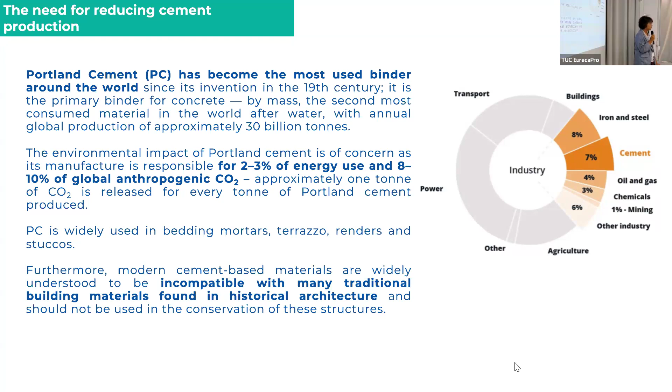This material is non-compatible with the historical ones. Therefore, there is a need to research and look for alternative supplementary materials.

Regarding terminology, when we talk about mortar, this is a mixture of binder, fine aggregates, and water. The fine aggregates are those with a dimension lower than 4 millimeters. Concrete is a mixture of aggregates of higher dimension, cement, and water.

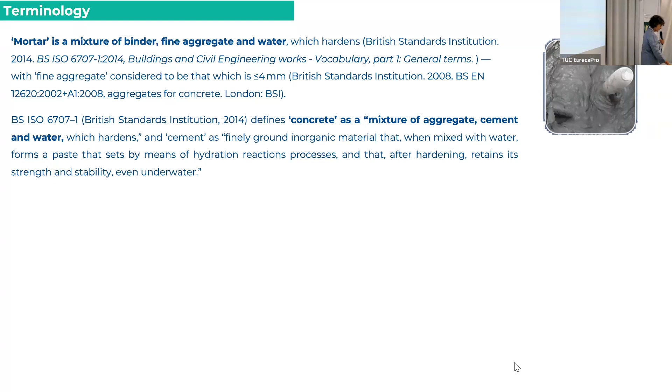In this process, the cement with water hardens and retains strength and stability even underwater. Cement is considered and reserved as a hydraulic binder with a low quantity of free lime.

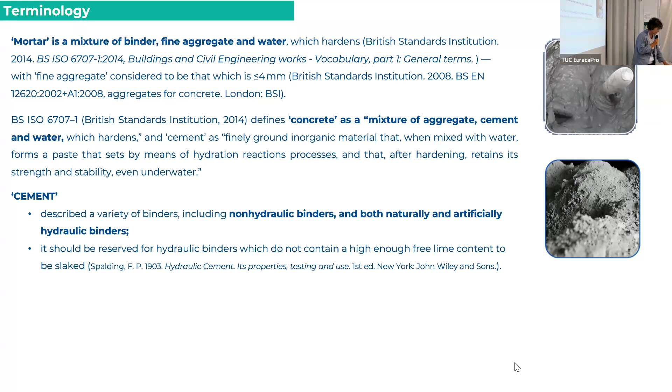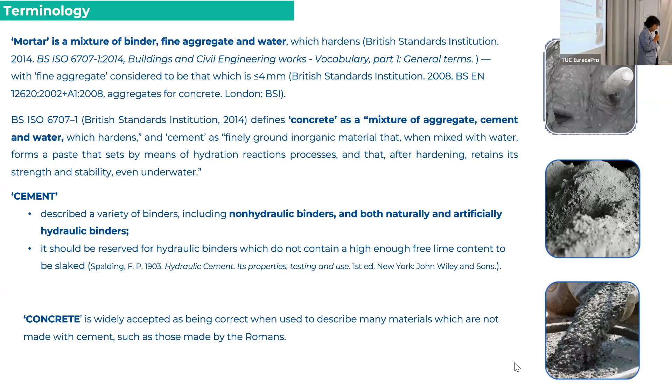We can use the term cement for describing other hydraulic binders, both natural and artificial. However, the term concrete refers to materials made with cement, but may not necessarily contain cement, such as those made by the Romans.

If we go a little bit into the past, looking at the use of lime and concrete in construction, we find early uses of lime employed for interior floors, and sometimes aggregates higher than 4 millimeters were used.

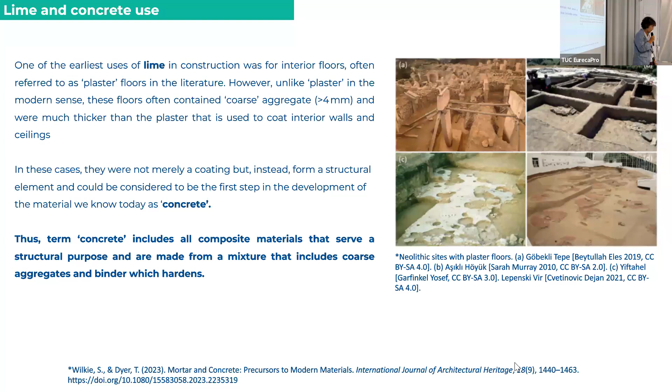Those aggregates and this mixture are considered the precursor material to concrete. Therefore, with the term concrete, we include all composite materials that serve a structural purpose, made from a mixture including coarse aggregates and a binder that hardens.

If we proceed with the burning of limestone, but in those materials we also add some siliceous material, then another very important hydraulic component, the calcium silicate hydrate, was yielding, and this material can also produce at the end calcite and silica after the deterioration process.

Similar is happened when we have the natural hydraulic limes in which we have an argillaceous or marlstone, and after the burning we have the production of calcite and the production of those hydraulic phases, which upon deterioration can give again calcite and silica.

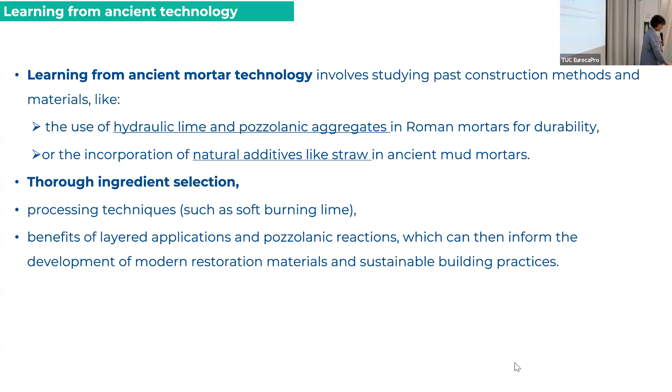Then we can have mortars with a great durability, and if we have a thorough ingredient selection of those mortars and with processing techniques like the soft burning lime, and if we benefit from the layered application and the pozzolanic reaction, then we can develop modern restoration materials and sustainable building practices.

And in that case, we have the reaction between slaked lime and high alkali materials, which can produce hard, durable, and waterproof material. Therefore, we can say that the addition of pozzolanic material to the aerial lime, which was widespread

by Romans, it was not a Roman discovery, but it was used in different civilizations from the antiquity and produced very hard and durable mortars.

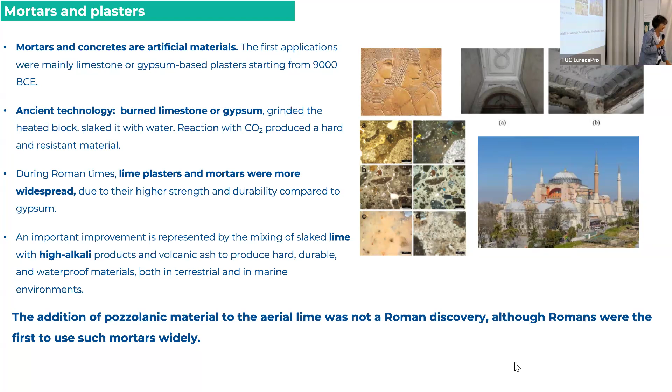So, what we have learned from the ancient mortar technology is the use of local materials and locally sourced materials, which provide compatible restoration mortars, but even they can also sustain the local economy of a place.

Then the use of hydraulic lime and natural and artificial pozzolanic materials, which form strong water-resistant compounds, different additives of inorganic and organic nature, the layered application of those mortars, which functions as a composite material, and this helps a lot to the final durable appearance and the consistency

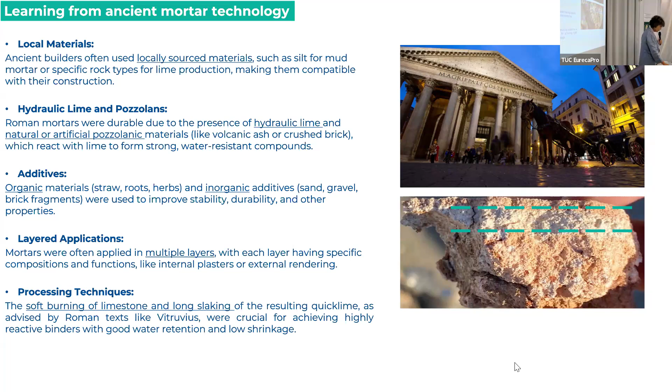of the mortar. And important thing is the soft burning of limestone and the long slaking of lime that resulted in materials with good water retention and low shrinkage.

Therefore, we have, after those applications, buildings and monuments like here the Great Wall of China, in which it was found that tree bark, volcanic ash, rice, beer, and even urine has been used as additives in the mortar preparations.

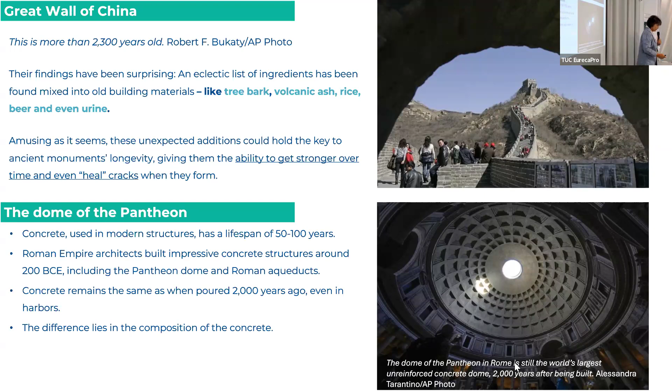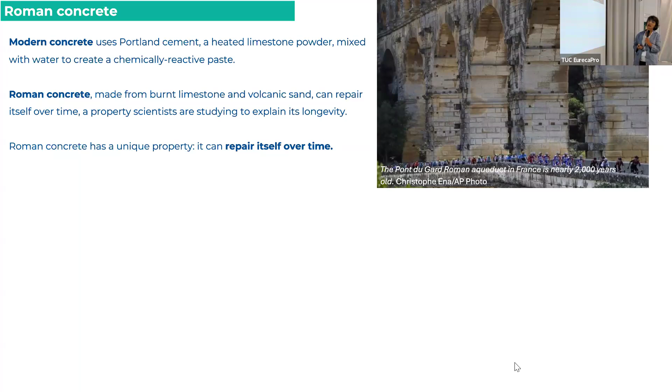Then we have the domes of the Pantheon, which is an impressive building and an example of not reinforced concrete 2,000 years ago. And we can also find some aqueducts in which the Roman concrete that was used and derived from burnt limestone and volcanic sand shows a very source of longevity here.

And finally, what is discovered from specific and explicit studies under the scanning electron microscope is that this ability of Roman concrete was due to its possibility to repair itself over time.

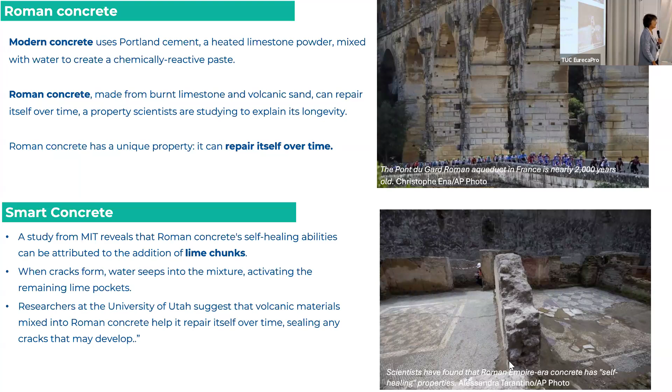And this is totally due to some lime chunks that were inside the structure, and those lime chunks can function as activating points when it was a necessity and produced again calcite. And after this process, they help a lot in the repairing of this concrete over the years.

Concluded, we have mortars that are fundamental in constructions and were applied for thousands of years. Those hydraulic binders that have been used from pozzolanic materials enable durable, watertight, and underwater structures. We have lightweight aggregates and early reinforcement attempts that reveal the remarkable engineering skill of that time.

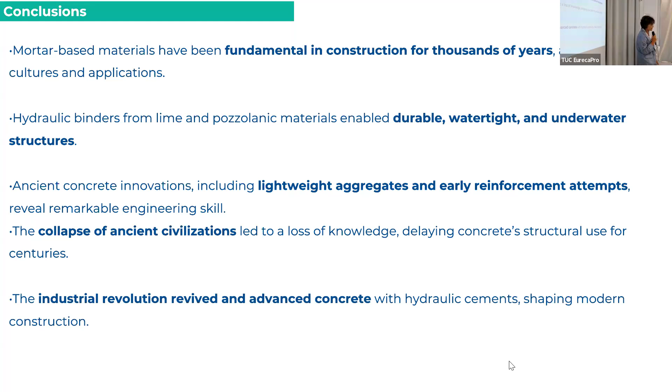Of course, the collapse of the ancient civilizations led to a loss of knowledge and delayed the concrete use for centuries. Nowadays, we have the industrial revolution, revived and advanced concrete with hydraulic cement that mainly shape the modern construction.

But we know that the conservation of historic sites requires the understanding of the site and the materials. So we have to produce and propose products that would be compatible to the original ones, and those can show an improvement compared to the historic materials, especially under the severe climate change effects that we face today.

Therefore, into this direction, the sustainability concerns with the Portland cement use highlight the importance of revisiting those historically locally sourced materials and how we can learn from the traditional construction techniques and how we may integrate those techniques and materials in the modern technology without copying exactly all these recipes, because nowadays we face other more severe problems.

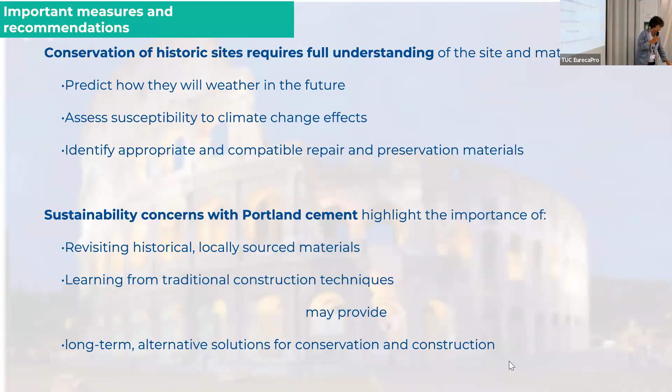And if we are going towards this direction, we may provide some long-term alternative solutions for conservation and construction. Thank you very much for your attention.

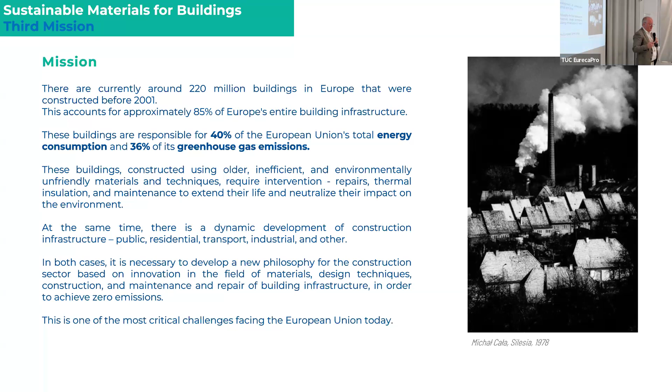This construction sector is really considered one of the most problematic in Europe nowadays, and brings very negative impact to the environment. That's for sure. The European Commission for many years didn't really want to admit it, so the construction sector was relatively abandoned by European Commission funds. Just now the European Commission started to see the problems with existing infrastructure, the needs, the money, and the environmental impact, so they decided to put some money on that.

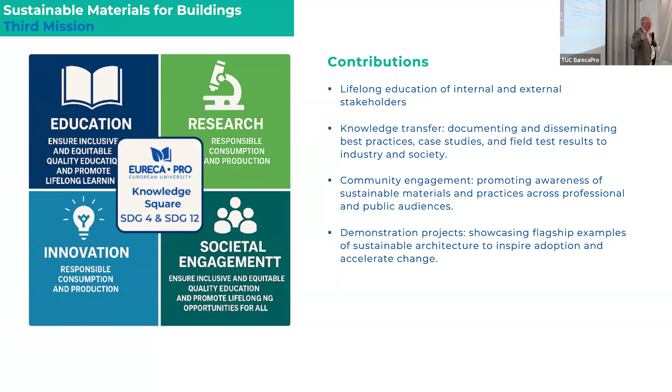I'll just recall what Noni said about the Square of Knowledge. Our idea of the flagship is based on the Square of Knowledge, and the third mission is a big part, but you can't just spread it—third mission is not far from innovation, it's all together, just one block. So if Noni is working in the laboratory, it will have an impact on stakeholders. We are stakeholders, you are stakeholders. You're sitting in a building, you'll return home to a building, you'll use roads, bridges, structures, concrete, non-renewable materials, energy consumption, and so on.

So in response to that, the European Commission decided to help us, recalling the old concept of Bauhaus. Bauhaus was a movement established in Weimar 100 years ago, just after World War I, in response to the needs of the stakeholders, the people. Just after the war in Germany, people had no places to live, the country was ruined, so there was an idea of cheap housing, environmentally friendly, beautiful and functional, simple, small, and close to other facilities, like a 15 minute walk.

We know this concept today as 15-minute cities—you go and have everything within 15 minutes. So that's also the idea. The new European Bauhaus today recalls this idea and brings political support, but also a lot of money needed for this sector. It joins the sustainability we believe in with something they call beautiful—it needs to be generally beautiful, but not treated simply as this is beautiful, it can be socially beautiful. It's much more than that, it's a philosophical question, and we should make it together, which is supposed to be inclusive.

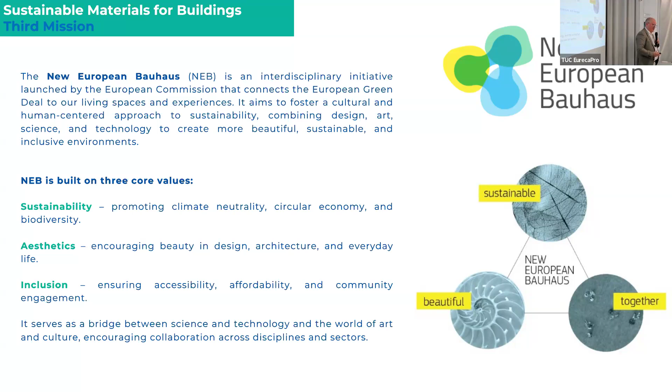The New European Bauhaus values are being used more and more in our group, it's organized, of course. The European Commission decided to give incentives and money to places they think need support. The first axis is called Reconnecting to Nature, focusing on restoring relationships between people and the natural environment through sustainable design, biodiversity, and ecological awareness.

Nothing about infrastructure directly here, but behind this there is a thought about infrastructure, new materials, sustainability of the built environment for people, for production, and so on.

Regaining the sense of belonging. So again, small cities, you know it from France, Le Corbusier, his ideas about unit cities, or 15-minute cities, friendly, green for the people. Prioritizing the places and people that need it the most, inclusiveness for those who really need it.

Behind this idea is, for example, building 450,000 small apartments for people who have no place to live. It's also to be built with innovative materials, cheap materials like timber, for example, that regains the interest of the European Commission.

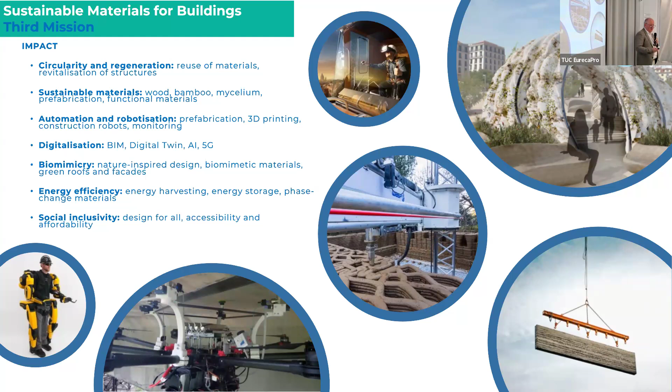So just to show you the momentum we are in with the European Commission, I will not read it through, you can probably see it later.

So, leaving this lovely slide at the end, we'll just appeal to your understanding of the need for establishing this flagship, together with this very unique possibility that we have, this unique momentum that the construction sector is at the moment. In my opinion, it would be a real pity if this group doesn't create something for having this aim in mind in our daily life under the auspices of EURECA-PRO. Thank you.

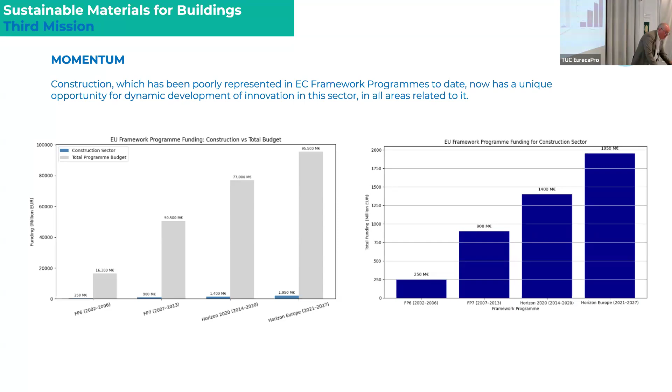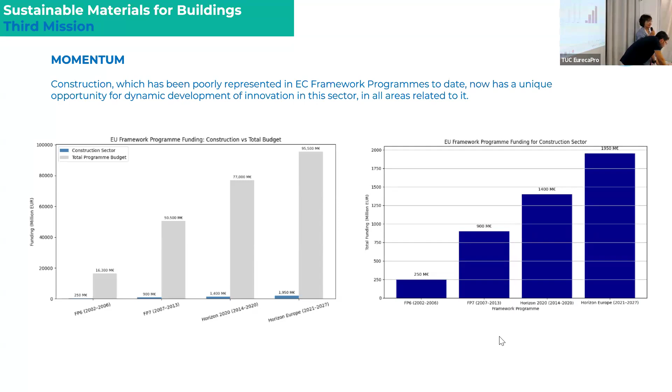Thank you, Marcin, for this very holistic presentation on the topics of our core group and our aim to establish the flagship in the EURECA-PRO Flagships. I would like to ask the next speaker, Galetakis, to present the role of recycling aggregates and construction materials in construction fields.

The content of my presentation: just a few words about construction and demolition waste, why we chose this stream of waste. Then I will talk in more detail about the research topics we have worked on, the research projects related to these topics, publications, and finally some words about lab infrastructure and team.

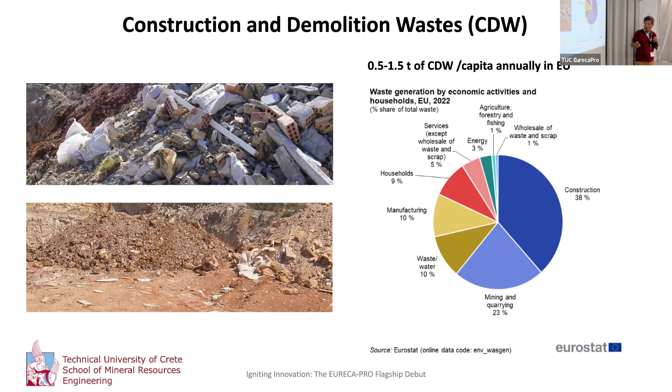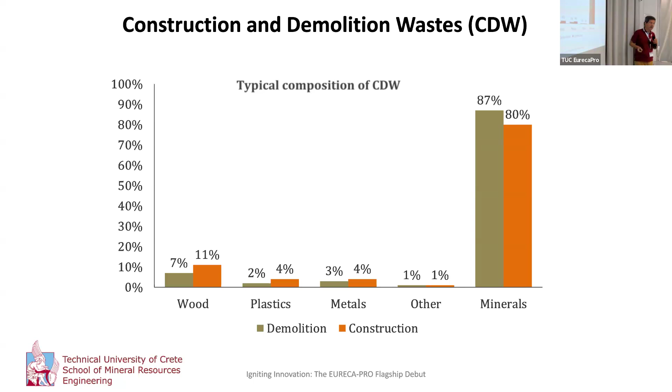Now let's see our research activities up to now regarding the utilization of these construction demolition materials. They can be categorized into two main fields. One is the best known, because the technology is quite simple and has been used for many years - how we can use these materials as aggregate, the simplest way to utilize it without developing expensive technology or using very intensive processes. So this is the first application: to produce aggregates.

The aggregates produced from this waste, if they don't have any treatment, are of low quality, meaning they can only be used for low-bearing concrete or as backfill material. If we want to produce upgraded aggregates, we have to make additional treatment - designing and constructing a more sophisticated crushing and sieving system to selectively separate the mortar from the primary virgin aggregates.

This is a field where we have already developed research activity, but we focus not only on producing upgraded aggregates, but also on finding a way to utilize the fine waste produced during liberation of these aggregates, since the cement paste is much more brittle than the aggregate and forms a very fine fraction that has to be utilized. One approach we've used is thermal activation - heating to around 600 degrees, which turns this material into a kind of cement again, so it can substitute part of the cement in mortars and concrete products.

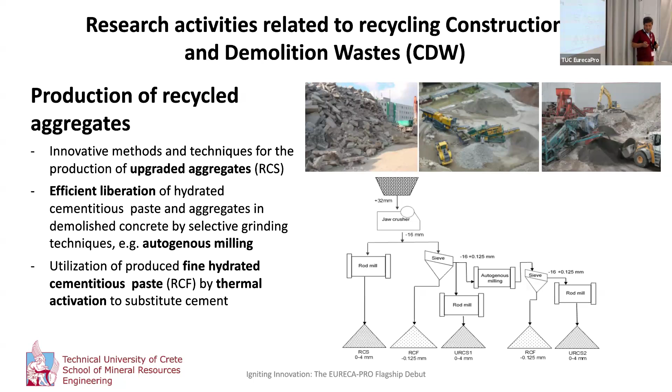Another research topic from the previous year is how to use aggregates produced from concrete, bricks, tiles, and other construction demolition materials to form common cementitious products like paving bricks and slabs. We have developed special technologies based on compaction molding, free flow casting, extrusion, and the more innovative geopolymerization.

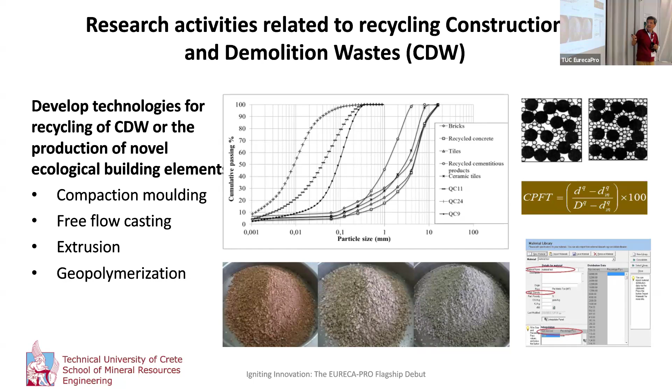The challenge is that recycled aggregates are not like natural ones. They have high water absorption and different shape and texture compared to natural aggregates. So we need to develop special models to predict the properties of the new cementitious material, and special synthesis mixing models based mainly on packing models of the grains. This is challenging work, and research on this topic is still ongoing.

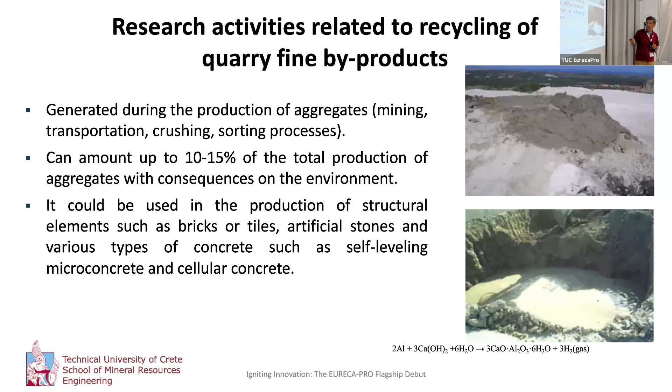Another problem the concrete construction industry faces is the production of fine waste material generated during aggregate production. This fine material constitutes a severe environmental problem, and we have to find solutions to utilize it. The solution we are exploring and developing at laboratory scale is...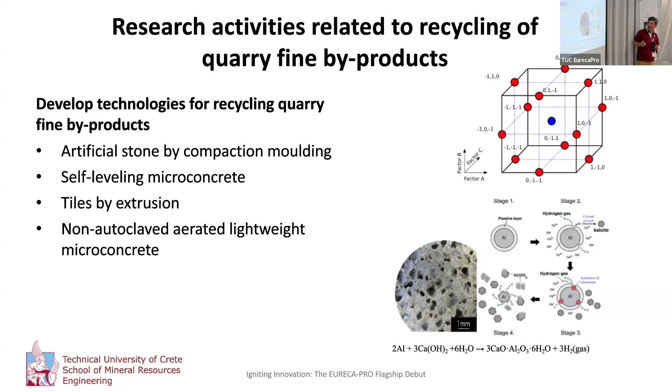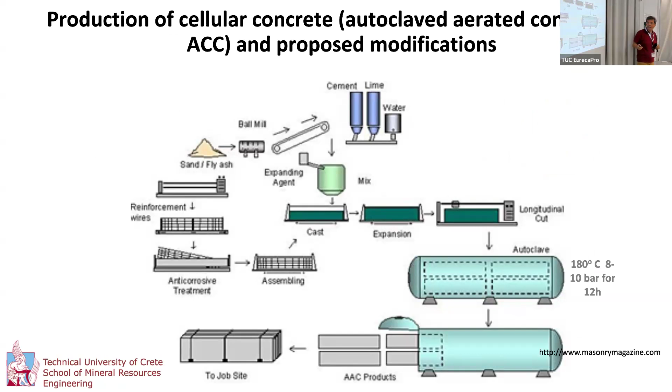...to produce either artificial stone by compaction molding, self-leveling microconcrete, or tiles by extrusion, or non-autoclave aerated lightweight concrete. I'll show you the idea. This lightweight microconcrete is a substitute for well-known commercial products like autoclave aerated concrete - you know the firm Ytong or something similar.

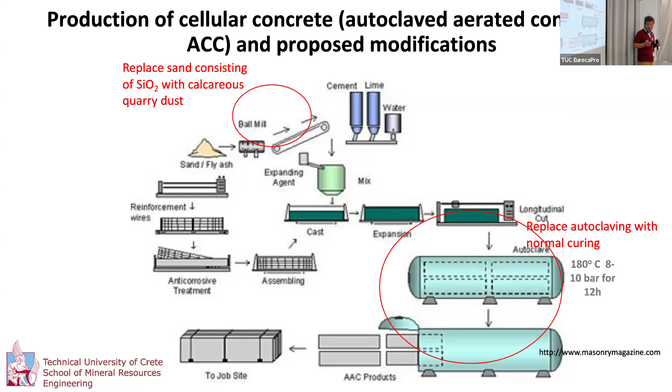We studied how this material is produced, and found we can substitute the silica sand used with fine material from quarry waste, and also substitute the autoclaving procedure with normal curing. This means we have a low energy consumption process, and we've produced this material at laboratory scale with these pores you can see. We are currently working on developing prototypes at a larger scale.

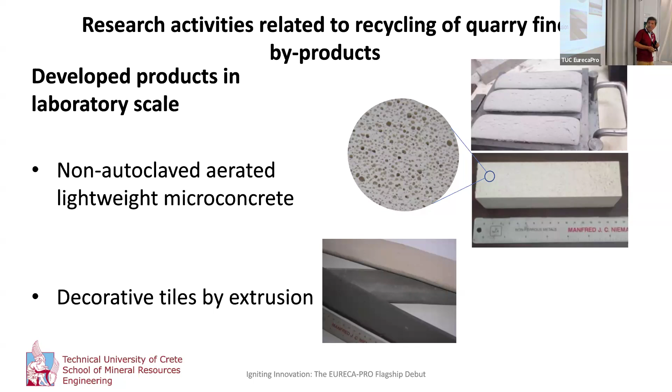Ongoing research also includes utilizing waste fine material from asphalt mix plants - another fine waste that poses severe environmental problems - to develop cement mortars with electrical energy storage capacities. This happens because this fine waste is enriched in carbon, which changes its electrical properties if treated in the right way.

So it can create a kind of battery. This means we can develop mortars or other cementitious products which can act like a battery in a building.

We are also working in another region, using fine quarry byproducts for production of lightweight concrete, but not using the common foams typically used for this - instead using a foam made from carbon dioxide and special chemical additives. We are also working on curing this cementitious material in a carbon dioxide environment instead of water.

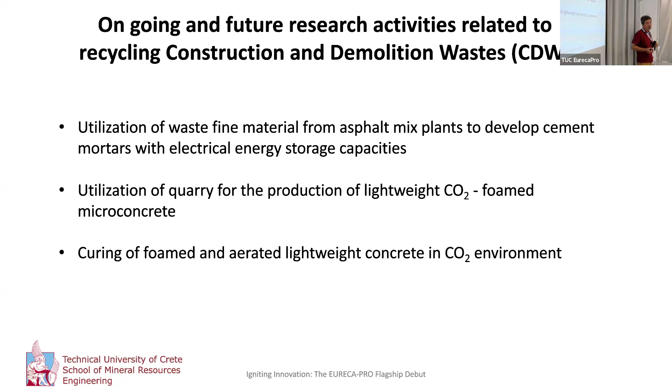This means the curing using this environment is shorter, and we also get a lot of environmental benefits because it absorbs carbon dioxide from the atmosphere.

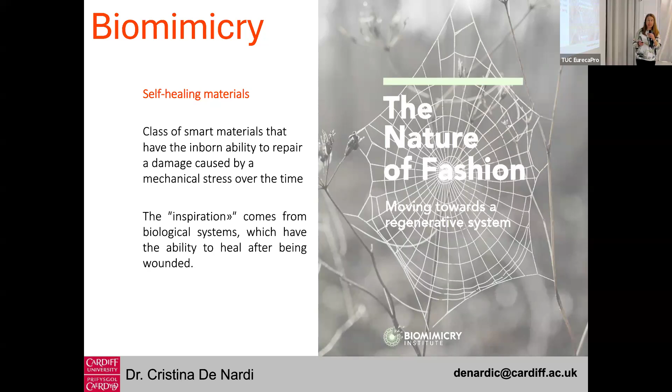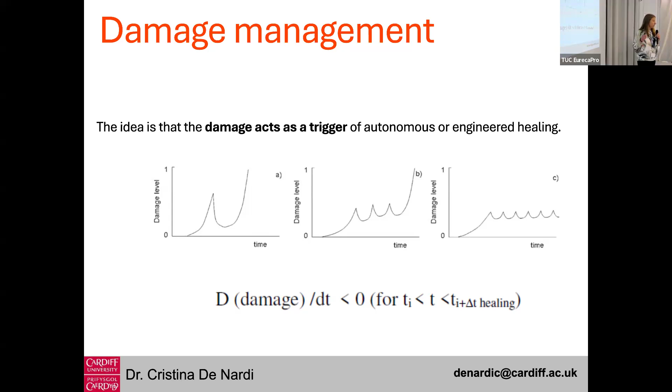So the inspiration comes from biological systems, that's why it's also called a nature-based solution material. We can't stop aging, we can't stop having damage, but we can consider a different approach in terms of damage management. The damage acts as a trigger for the self-healing. So we include the damage as part of the healing process.

Among other technologies widely studied in concrete mainly, but also in asphalt or polymers, I would like to introduce vascular networks. The inspiration comes from the arterial system in human bodies. Ideally, you can have an arterial system running in your building, and those vascular networks can host healing agents, giving you the opportunity to supply different healing agents at different times, or to continually supply healing agent if needed.

But as you can imagine, the real scale is not yet constructed. So in Cardiff, we have developed an alternative technology which still keeps the concept but is more reliable. We designed what we call mesovascular networks.

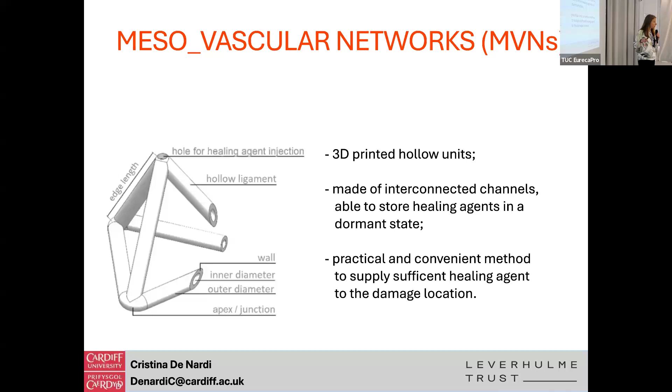They are 3D printed hollow units made by interconnected channels, and they can store healing agent inside. So when you have a crack, and the crack crosses one or more of those ligaments, they are broken, and at that time they can release what was stored inside.

So they can store single component healing agents, basically silicates, or they can also store a dual component healing agent, as most common adhesives are made of two components. They are made by two coaxial channels, so when you have a rupture, the crack also occurs in the matrix.

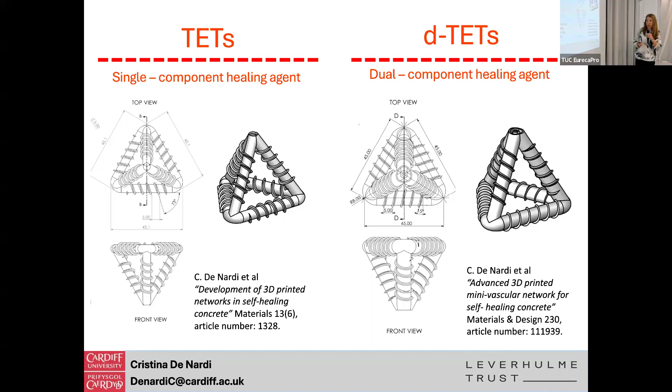The stress can be transferred to the units. You have the breakage of the units, and only at that time the two components come together and can react in the concrete matrix. We test them at lab scale at the moment.

We place them in the middle third of concrete prisms. We use sodium silicate as a single component, or sodium silicate in combination with nanolime or nanosilica, because those second parts can act as an enhancer or promoter of the healing reactions. We test them under flexural test, and we analyze what we call index of healing in terms of strength and stiffness, which is not so complicated - we are basically comparing the flexural strength after healing in relation to the original strength before damage, and to the residual flexural strength.

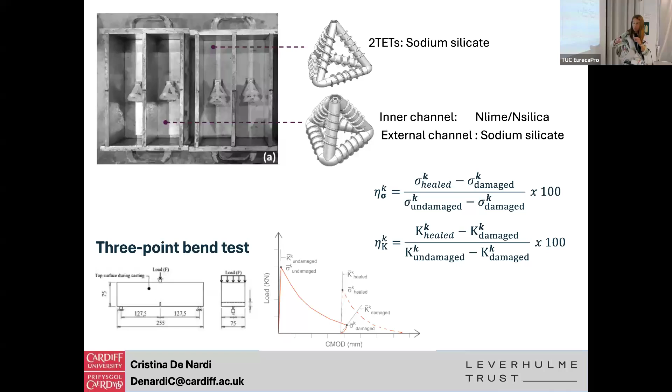Here is how we place them in the middle third. These are pictures when the sample was under load. You can see a clear discoloration in the center, which means that what was stored inside has been released, so it's able to react.

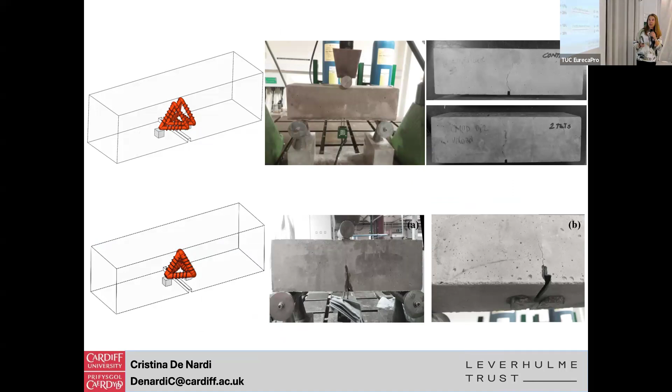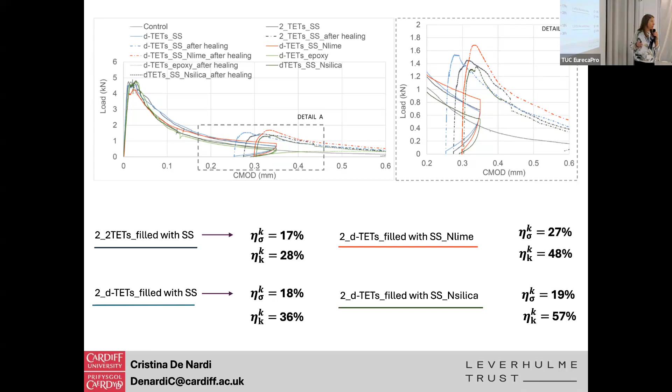Briefly, with a single component you can recover the strength by about 17%. With a combination of sodium silicate plus nanolime, you can gain 10% more in strength recovery, and 20% in terms of stiffness. So when they are together at the time of damage, they can respond with more healing efficiency.

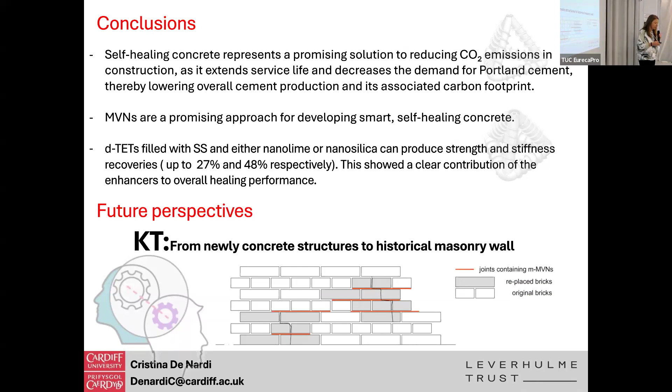In conclusion, we can transfer what is done by biological systems into construction materials. We have a promising approach based on these mesovascular networks. But I would like to go further, transferring this knowledge - built up over about two decades so far - from newly built concrete structures to historic buildings, and see how we can transfer some of those technologies into historical masonry structures with the proper requirements.

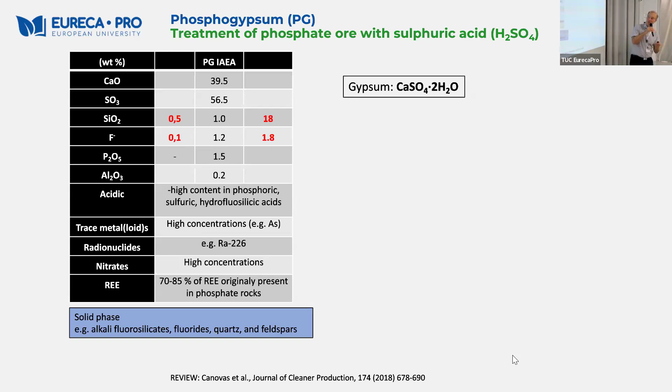Again, here we're looking at phosphogypsum, and the specific thing which makes it interesting for me is that it also contains trace elements of naturally occurring radionuclides. Since I'm linked to nuclear technology, I focus on the residues which have this kind of issue, and I try to see how we can deal with that.

An important concern is, in this case, the phosphogypsum. If you compare it a bit from the point of view of natural radioactivity with other types of gypsum, it's very broad. For example, many types of phosphogypsum don't really have any issues with the presence of naturally occurring radionuclides, while some have larger issues than others. This also applies to other trace elements or rare earth elements, which very much depend on the process or the origin of the ores used. This is typical for many residues - there's a very diverse picture, and it's difficult to come up with one solution for all these types of residues.

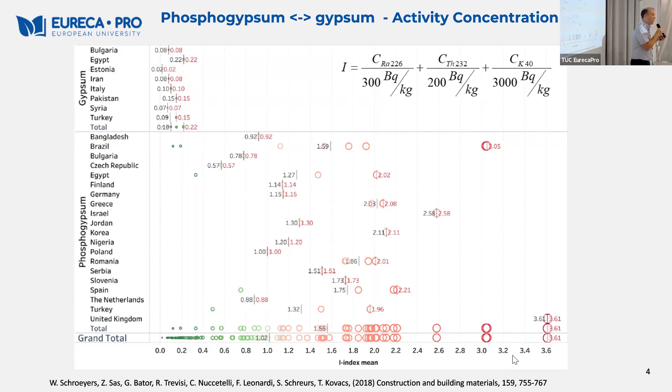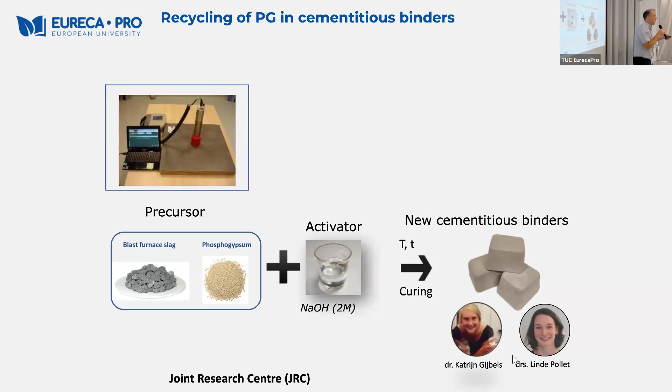Anyway, as we said, we are focusing on recycling in cement or construction. We are considering alkali-activated materials, or in our case aggregate binders, where even phosphogypsum can have a much more beneficial function. So we're looking generally at all types of synthesis binders, asking: are these suitable options for phosphogypsum recycling? And of course, we are technical people, so we think if we can solve all the technical issues - durability, strength-related properties, soundness, expansions - if we can deal with all these, we believe recycling will be fine.

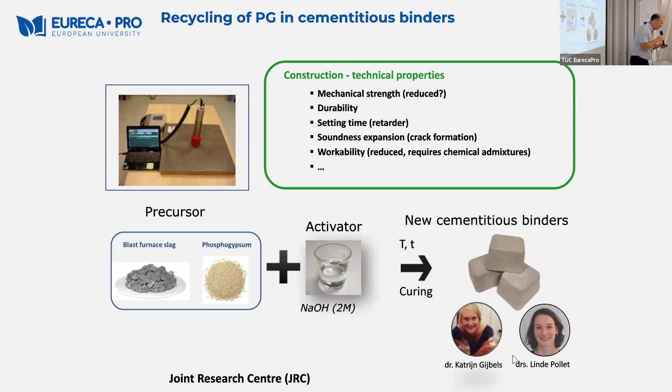But is it? One of the main challenges - I just had a PhD student of mine who graduated in this field, and that went really out of my comfort zone, because we were looking at stakeholder acceptance. We are thinking, okay, we're calling these residues norm, we're calling this waste, and then we think people are just going to accept it even if we put in a treatment and use them in cement or concrete. The moment you put a label on it, you're really putting a barrier for the cycle.

In this case, we look at different types of perspectives. I will look at the perspective of industry, and I'll tell you why. As an end user, are you really going to choose the type of cement for your house? No, you're going to rely on the companies and subcontractors to make that choice for you. But if there's something wrong with these residues or materials, you're going to hold them accountable. So the industrial acceptance and point of view is crucial. So we looked at industrial stakeholders, and we said, okay, we have these residues.

We are just taking phosphogypsum as an example. How would you look at accepting this type of residue for use in cement in construction? Which factors do you consider?

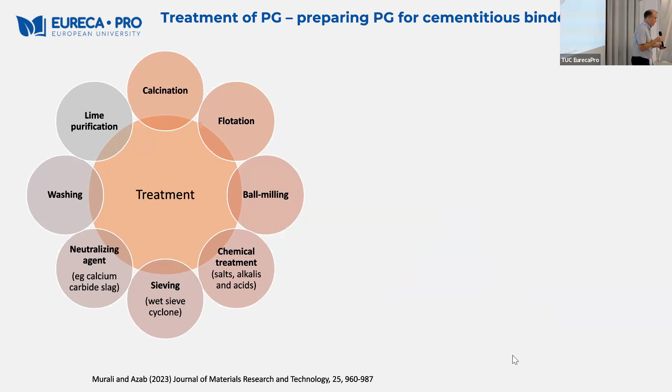I'm just saying some ways to overcome that, and sometimes for this type of residue I only see this option. I believe we need to treat, because regulation will change so drastically that we need all kinds of treatments for these residues, to make sure they are not a norm anymore - otherwise at a certain point you will reach problems if you don't provide suitable treatment.

These treatments will also make your residues suitable for construction. I tried for a long time to get real reuse without treatment, but I found that at a certain point that will go wrong - things will catch up with you.

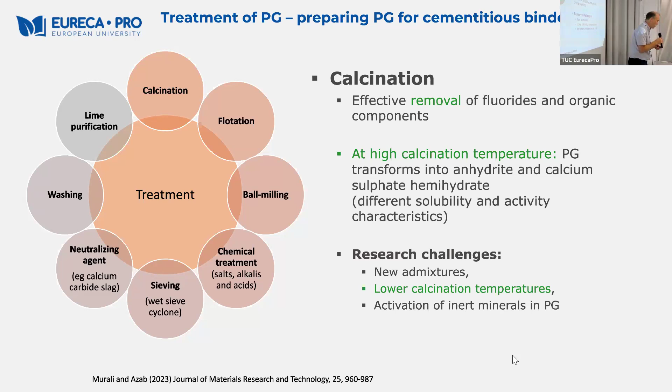All these treatments will make sure that you have a much better quality of construction material, which is crucial for this kind of approach. I'm not going in depth there - I think I've made the key point I wanted to make.

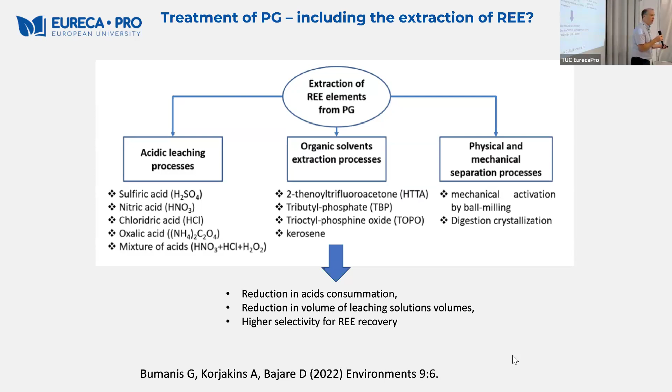So you look for added value, of course, but unfortunately you cannot always get added value, depending on the residue you're looking at and its properties. So this is basically what I wanted to tell you. Thank you for your attention.

Thank you, Wouter, for this presentation. The introduction is important for another aspect we will cover in this workshop - very important, the guidelines for upscaling a product and having this collaboration with companies.

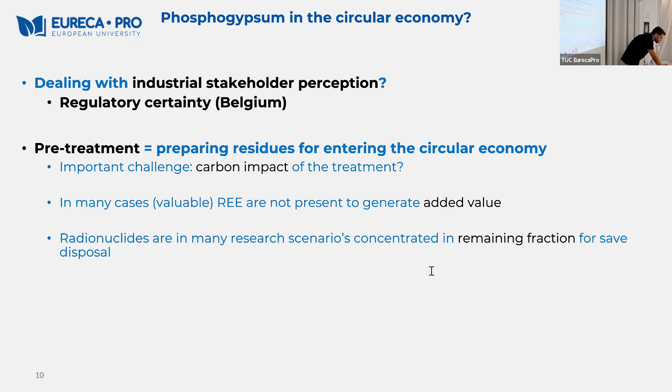Now I would like to ask Henry Goldmann to express his experiences as a student here at the Technical University of Crete. In my point of view, it's very important for the configuration and establishment of the flagship to have support from the PhD students, as important research can contribute to the formation of knowledge and so on.

Thank you very much. I am honored to be invited by Professor Maravelaki to give this speech, especially here at the Technical University of Crete, where my journey with EURECA-PRO actually started. I am a PhD student in my final stages at the Silesian University of Technology.

I am dealing with construction materials, but especially functional materials, which were already mentioned by Professor Gorsky before. In my experience with EURECA-PRO, as I mentioned, it started with a few events - the most important of which were needed for me to acquire a EURECA-PRO PhD certificate, which is also a measure of my devotion, and my colleagues' devotion, to sustainability.

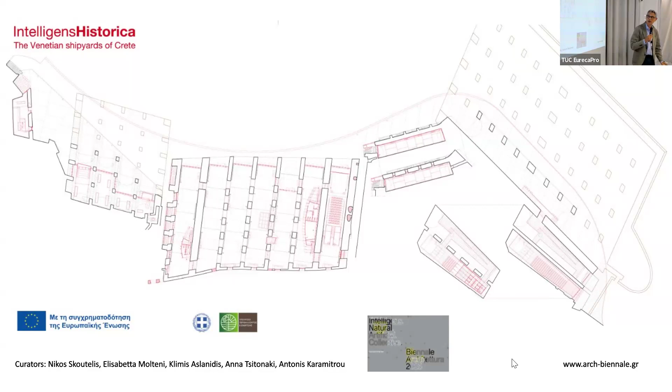So we exhibited the two projects that we had already prepared for the restoration and reuse of the Venetian shipyards of Crete. One complex is in Heraklion, and the other one is in Chania. In this case, we presented the two projects together. In the middle here you see our proposal for the restoration of the shipyards of Chania, and on the sides, Heraklion, which I'm going to explain later on.

This is the complex of the Venetian shipyards of Chania, built in the 16th century, a completely abandoned building complex with 7 large vaulted halls, empty now, part of a bigger complex that consisted of 17 shipyards, very much neglected, right in the very heart of the old port of the city.

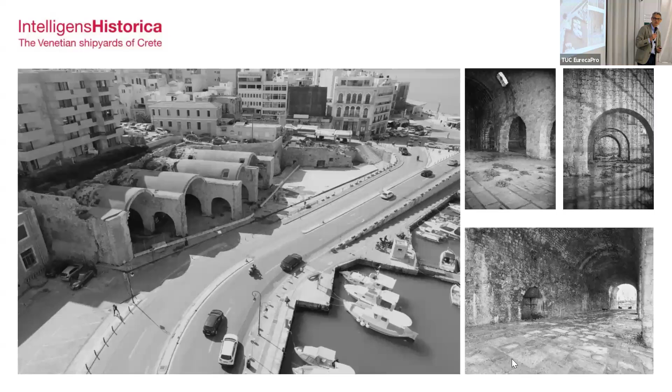This is for parts of an even larger complex in the city of Heraklion, in the historical harbor, that contains a series of four partly collapsed vaulted halls, and also other storage rooms built by the Venetians in the 16th century, as well as a big cistern, an empty historic cistern.

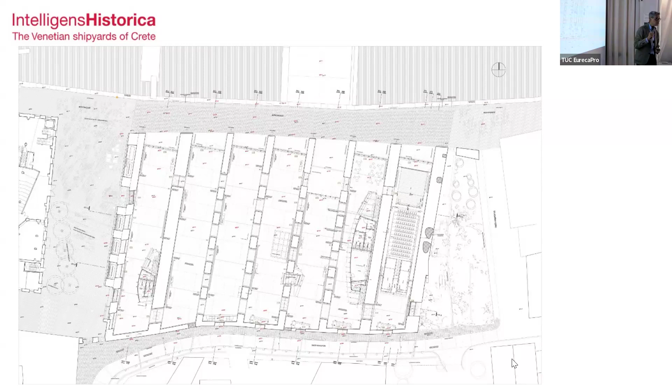This is our proposal for the conservation and reuse in Chania, where a large cultural center would be created with minimal interventions in the interior, so as to have a big exhibition area to the left side, as well as a small theater to the right side here of the drawing.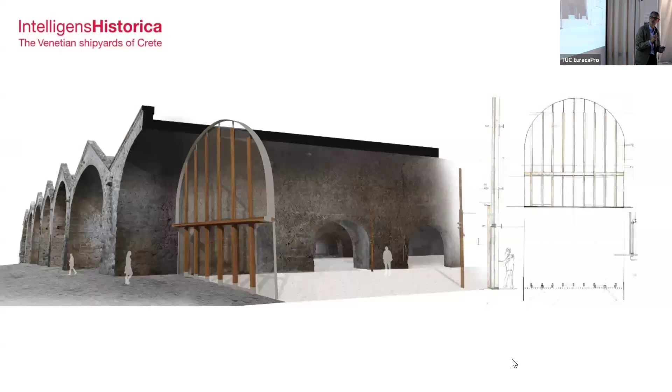So all the historic building will be conserved with sustainable materials based on the research by Professor Noni Maravelaki, because, as already mentioned, this is part of an interdisciplinary work of a very large team here at the Technical University of Crete. Lime mortars and also traditional techniques that were studied during this research are going to be used for the conservation of the building complex, and all new additions will be designed in a way that creates this dialogue with history. Timber will mainly be used for these new additions, especially large timber as the one used by the Venetians in the 16th century.

These are technical detailed drawings showing this use of timber, as well as the use of lime mortars on the walls and on the roofs of the building.

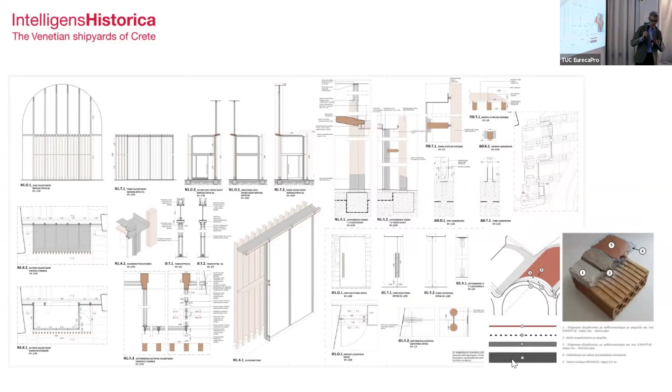And this is the proposal for the shipyards in Heraklion, where also a cultural center will be created, and that we are hoping will regenerate the very heart of the city, the historic harbor that is now very much neglected.

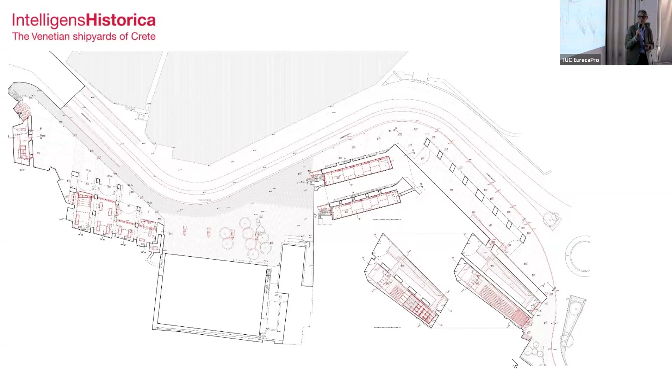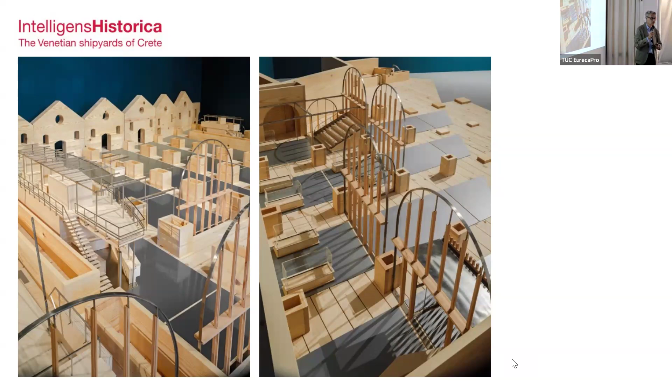Some photographs of the Greek pavilion: a very large model made of timber was built, combining these two projects together and explaining how new constructions are integrated within the old building. Our idea was to create exactly a very big model, because on one hand we want to convince everyone of our idea, but also because we want to stress this idea of focusing on construction and the use of materials in contemporary architecture, exposing this use of materials.

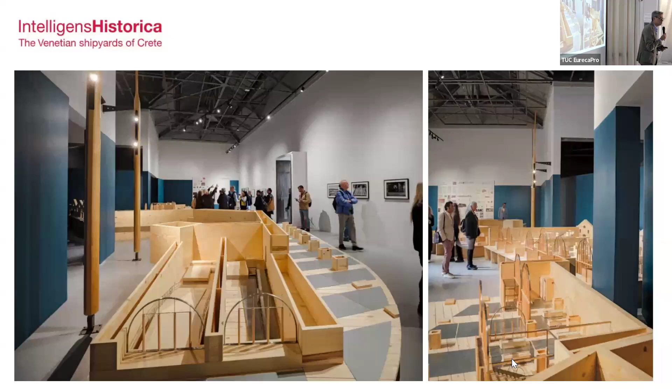So these are different views of the model presented in the exhibition. In conclusion, I would like to especially stress how adaptive reuse today is a main question for contemporary architecture, and how we as architects want to collaborate with experts on materials, as adaptive reuse of historic buildings must give an answer to contemporary architectural questions.

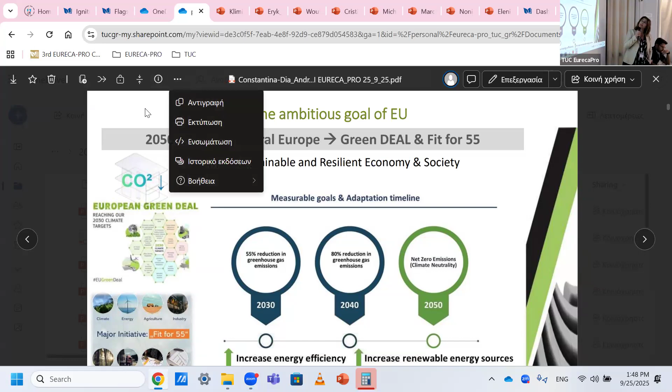And how this can be done through the Green Deal and the Fit for 55. So the European Union set some measurable goals and took some actions in order to achieve these targets. You can see that the first target is to have a 55% reduction in greenhouse gas emissions until 2030.

And for the built environment, how this can be achieved. This can be achieved with using renewable energy sources, with increasing the energy efficiency in our buildings.

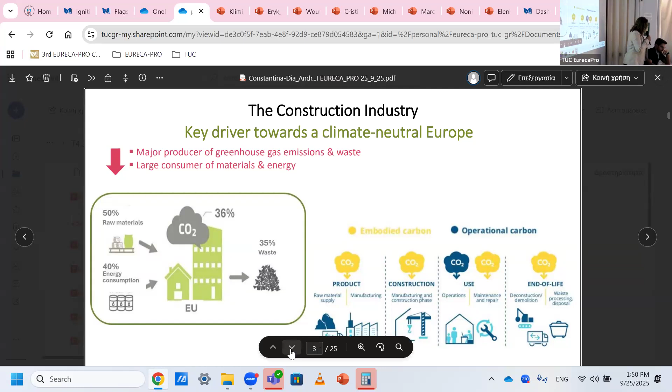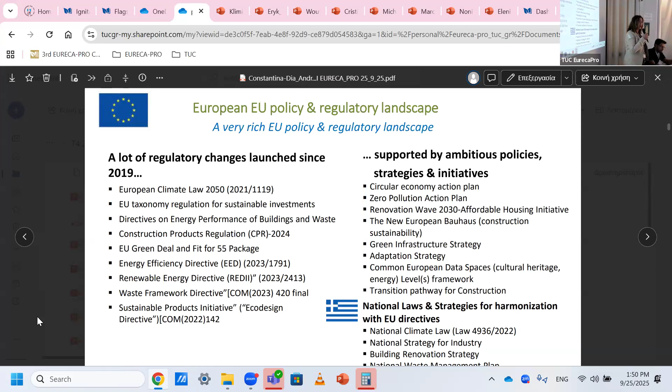Here you can see all the legislations and strategies that the European Union set in order to achieve these goals. We are talking about a very complex legislation landscape. You know some of them, the Green Deal or the Fit for 55, the taxonomy, and all these are supported by other policies, strategies, and initiatives, which then in each country need to be transformed into national strategies, but also national laws, in order to be harmonized with the European directives. So we can understand that we are talking about a very complex landscape because of this legislation that came out due to these new goals.

And you can understand that in this complex environment, the construction industry is a key player, but needs to be transformed, needs to create more resilient supply chains, more resilient infrastructure, find and adapt sustainable ways of production, be more extroverted, green, digital, comply with all these regulations, but also be more people-centric, which is the new dimension today for the European Union.

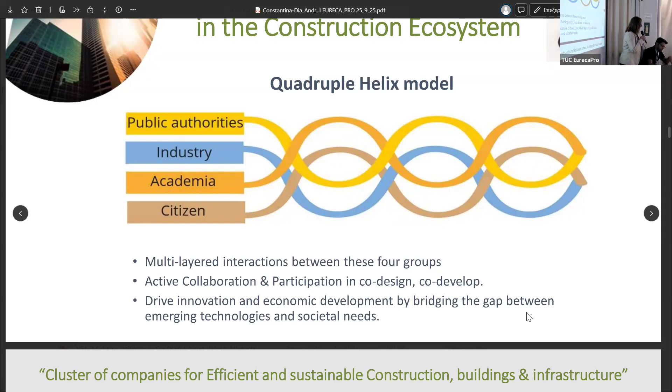In Greece, we have the cluster e-CODOMH, the Greek cluster for the construction sector. It is located in the central part of Greece.

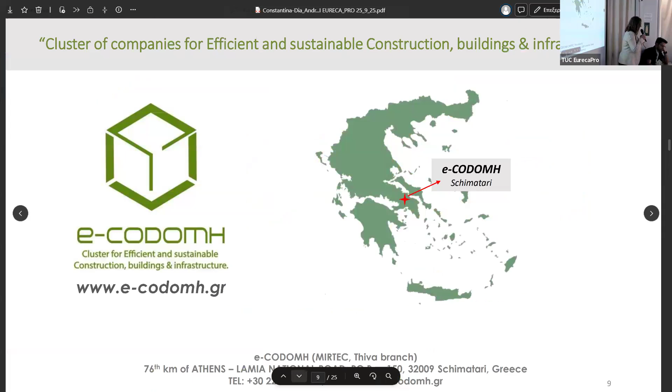This is a non-profit company, Cluster e-CODOMH. It was founded in January 2022. It is the first Greek innovation cluster of the construction sector in Greece, and the facilitator of the cluster is MIRTEC, which is actually the coach and enabler of this cluster.

Okay, the vision is to become an innovative ecosystem for the Greek building materials and construction sector. Our mission is to upgrade entrepreneurship for companies in Greece, working under 4 pillars: quality, innovation, knowledge, and synergies. But today we also need to be transformed and include the society. So we are trying to develop closer links with the citizens.

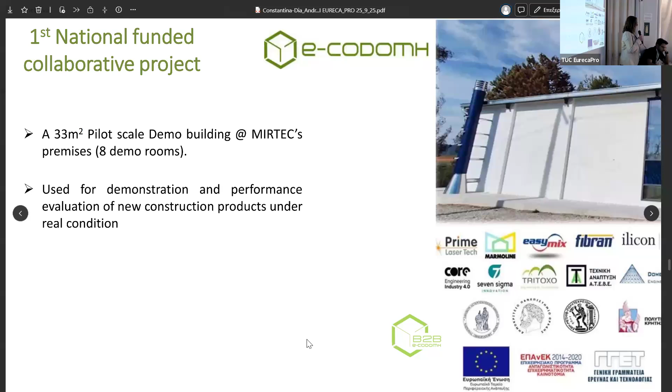We are trying to promote active collaboration between our members, and we participate with them in funding projects. Here you can see the first national funded project implemented by our members. In this project, our members collaborated, industry and academia, and developed some innovative building materials, all of them demonstrated in a demo building. Here you can see the building, used not only for demonstration but also to perform and study the performance of these innovative materials during real conditions.

And from last March, e-CODOMH is also a Built4People innovation cluster. Through the STAR*track project, we have the opportunity to officially become a cluster with other Built4People innovation clusters in Europe, in order to collaborate and build our maturation on the way we can add value to our members.

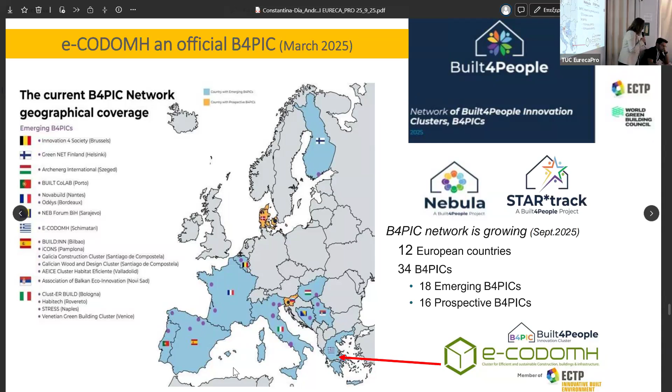Here you can see the STAR*track project. It is a CSA action project, but builds on the synergies between NEB, the New European Bauhaus that was referred to by Professor Goldmann before, and the Built4People partnership. So these two are the priorities in this collaboration scheme.